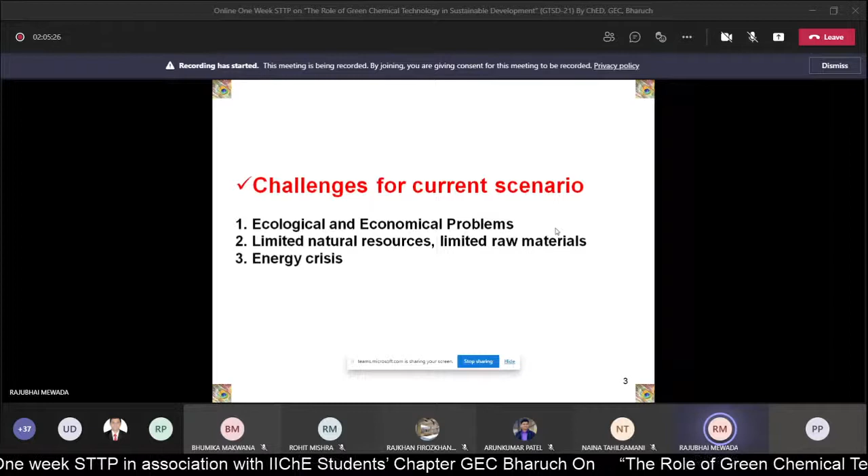So challenges - we all are facing ecological, economical and environmental problems. In a broader prospect, we are all aware that vehicular emissions, coming out from different vehicles like two-wheelers, four-wheelers, etc., whatever the fuel source - petrol, diesel, even CNG to some extent - it contributes probably the largest amount of pollution.

And the second issue is that it is mobile, moving, so it's very difficult to tap. Industrial gases are also another source of environmental pollution, but again this is with reference to air pollution we are talking about. All the major metro cities, including Ahmedabad, have severe air pollution levels. If you look at the air quality data published by the CPCB or GPCB, it's really very poor, and alarming at the same time.

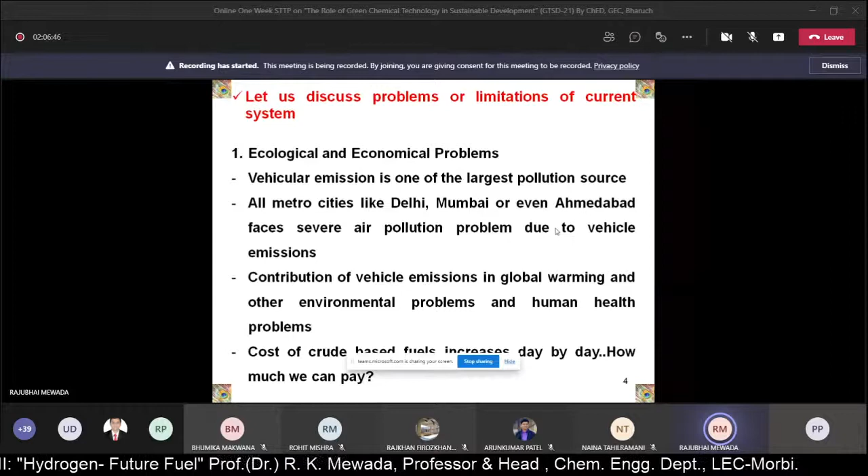Contribution of vehicle emissions to global warming is another big challenge, and all countries, including India, are trying to reduce carbon footprint. People are thinking to go for such fuel which can reduce not only emission issues but also be better for the environment.

And definitely cost-wise, prices of fuel are going up like rocket prices, extremely high. We don't know where this will stop, how much we will have to pay over time - we have seen drastic changes in the prices. Different scenarios are there, but we still have to accept that prices are going to continue to rise, and that's why different competitive technologies may come forward.

Limitations in terms of production and availability from the natural resource point of view. Crude oil as a natural resource is naturally available, we can't synthesize it in the laboratory, and it is available in a very limited geographical location.

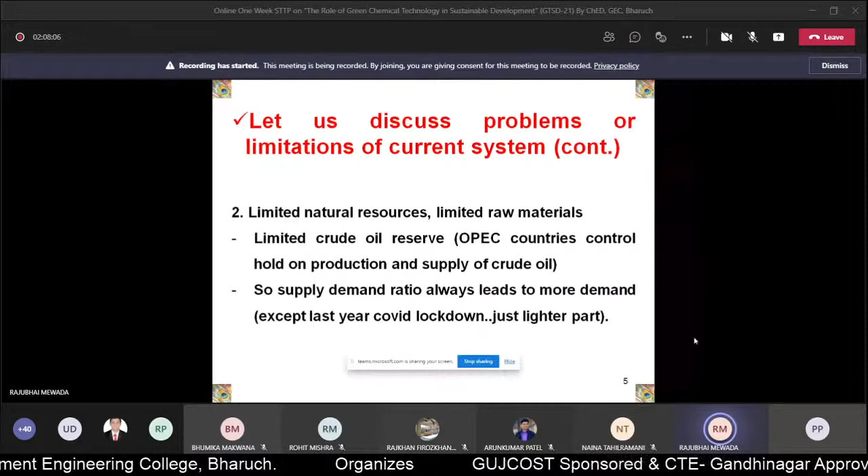OPEC are the countries who are producing and ultimately controlling oil prices. The supply demand ratio always leads to more demand, and that's the reason cost is going to increase, except last year where lockdown was there and crude oil prices suddenly came down.

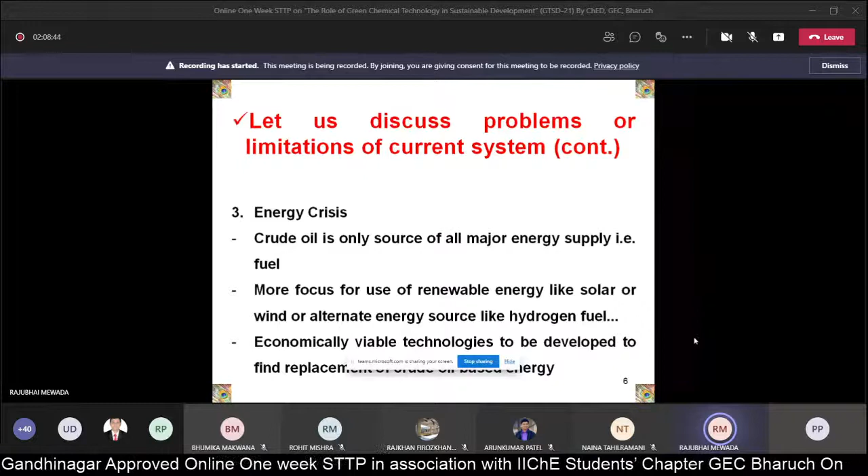Otherwise it's always going to be costlier. There's an energy crisis - demand for energy, and India being a developing country, unlike developed countries whose demands are stabilized, we are saying we are going to become a developed country. One of the GDP parameters is energy consumption pattern, so it is likely to increase tremendously. Whatever current energy consumption level we have, we expect much larger utilization in the coming future.

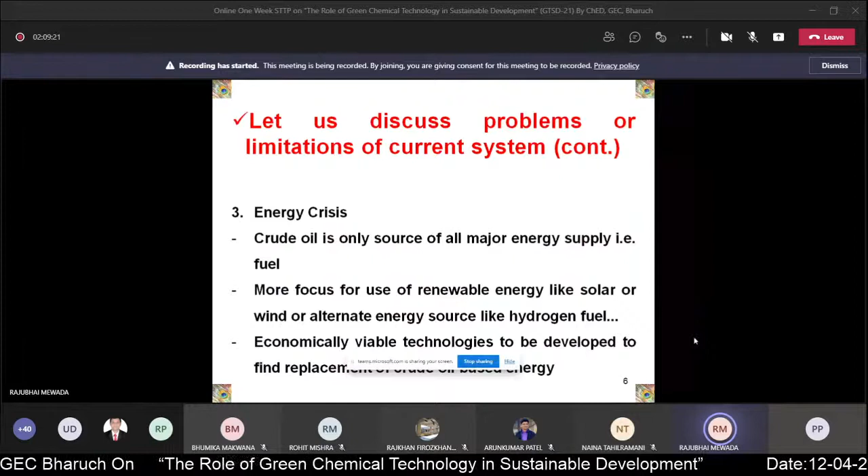Energy is required for industrial applications and also for transportation vehicles - that demand is going to be huge. So we expect an energy crisis, and we need to find a solution that can support environment, economics, and ecology. That's what we are looking for - what are the various possible solutions, and how best we can look forward.

People are talking about electric vehicles, which is definitely one of the best options available, and to some extent it has been applied and is being used nowadays. A few electric cars and electric vehicles are available on the road, and it's a successful technology.

But today I'm going to discuss hydrogen as a promising future fuel. We know that when hydrogen burns, it ultimately gives only water - H2 plus O2 gives water, and there are different technologies available.

We can produce energy from hydrogen through fuel cell or by combustion. Ultimately, when we combine H2 plus O2, it gives a tremendous amount of energy, and that energy we need to utilize.

But the thing is how we can produce it, because ultimately we are looking for hydrogen from water only. The method I'm going to propose should be sustainable - that's our objective. So whatever technology we propose should be sustainable, meaning it should be good for us as well as for our future generations.

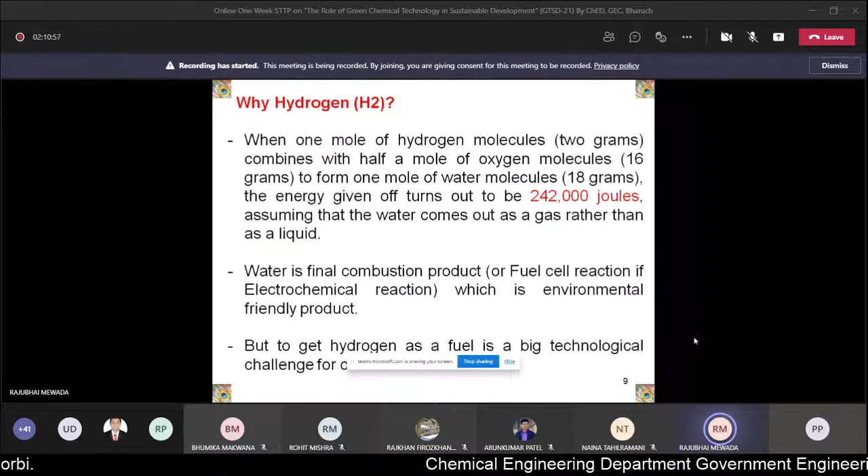So from that point of view, which fuel, how can we get the hydrogen? That is the biggest question - how can we get hydrogen? Hydrogen is good for utilization as a fuel for vehicular purposes, for energy purposes. But how can we get this hydrogen?

There's the amount of hydrogen we require, and different challenges - at the end of the PPT I've added a small portion, one slide regarding storage and transportation. That is another big difficulty. But right now our major focus is on the production aspects.

If we look at current technologies available right now, our common production technologies involve syngas production, either from naphtha or other crude-based raw materials - we can produce carbon monoxide plus hydrogen. Even coal gives us syngas, we can produce synthesis gas. But ultimately, hydrogen comes from either crude oil or coal-based raw material, which is going to be much costlier.

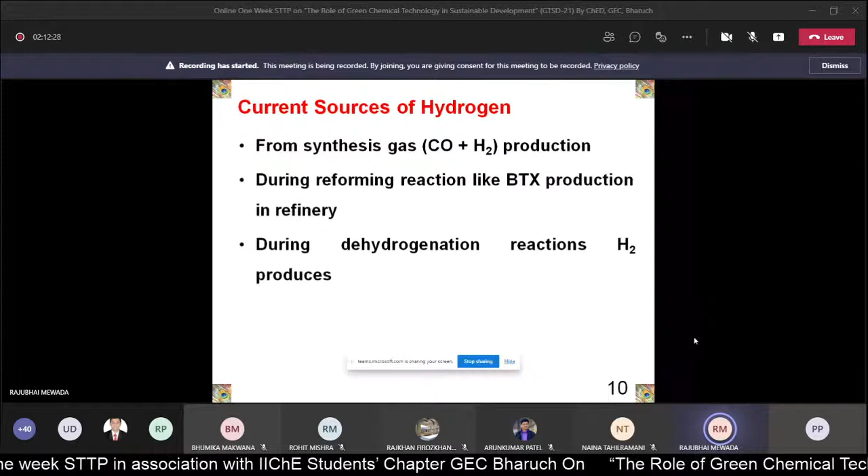The second option available is that hydrogen is produced currently in a refinery through reforming reactions - not steam reforming, but regular reforming reactions where we convert linear alkanes to aromatic chains in terms of benzene, toluene, and xylenes, which also produces a small amount of hydrogen. There are a few other sources of hydrogen production, such as dehydrogenation reactions.

But if you look at it right now, none of the refinery... I'm trying to compare with the sulfur case. In the previous days, we used to produce sulfur through the earth's crust.

We get sulfur from sulfur ores, which we process to get pure sulfur, a required raw material for sulfuric acid production. But nowadays, practically all the sulfur is coming from the refinery, whatever sulfur is required for different applications, not only for sulfuric acid production but for vulcanization, etc.

So where does it come from? Ultimately, all refineries need to reduce the sulfur content of various products, maybe petrol, diesel, kerosene, or other products, because sulfur content needs to be reduced substantially. That's why refineries convert sulfur molecules into H2S, and through the Claus process reduce it to elemental sulfur, which becomes a major raw material source for different applications.

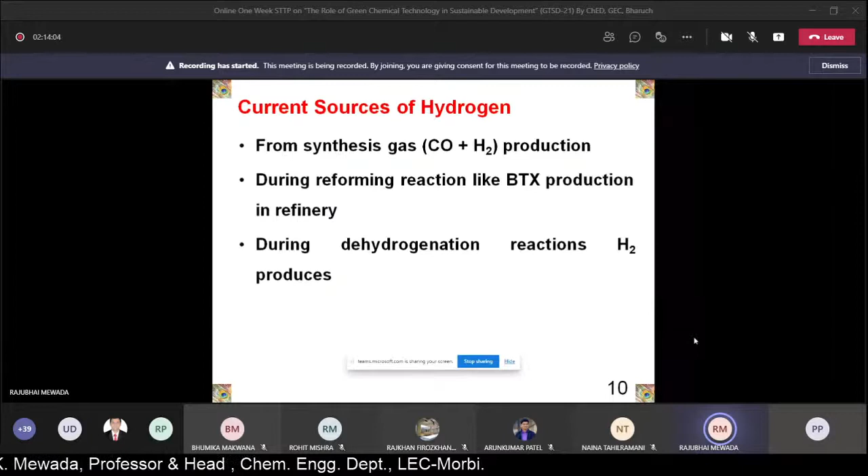So can we expect the same scenario for hydrogen? Can refineries produce hydrogen in excess that can be used as a fuel for different applications? Probably not. Why is it not possible?

If you look at it, all refineries have to treat sulfur nowadays because as per new government laws, we now have BS standard 6. Similarly, European standards are continuously reducing sulfur content requirements in fuel composition. If you look at the 1990s, we had almost 5% sulfur, then we moved to 50 ppm, then 10 ppm, and we're trying to reduce further.

It's expected that, for example in diesel fuel, it should ideally be sulfur free. So if we want to make it sulfur free, we need technologies that can remove sulfur completely. From a technological point of view, it's a big challenge.

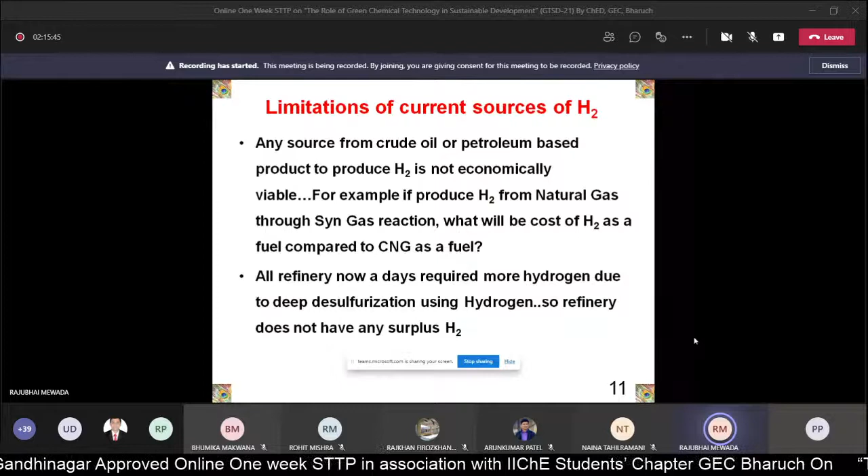So refineries need hydrogen again, because all desulfurization technologies ultimately involve hydrogenation. Deep desulfurization technologies, whatever the product, ultimately involve hydrogen. That's why refinery demand for hydrogen is also increasing for these applications, specifically desulfurization technologies. So hydrogen availability within the refinery is not in excess.

Refineries don't have any excess hydrogen; rather, they need to specifically produce hydrogen for that application. Whatever hydrogen is produced, either through reforming operations or dehydrogenation operations, is routed or utilized within the refinery for desulfurization technologies. That's why we can't expect hydrogen to be excess available with the refinery for us to use.

Second aspect: can we produce hydrogen from syngas, either from coal or CNG or any other raw material source? Probably not. Simple logic: if I try to produce hydrogen by reforming naphtha or natural gas, compare the price of hydrogen produced from CNG or natural gas versus the cost of CNG available and the cost of producing hydrogen.

Ultimately my purpose is the same either way - I need to compress it and put it in a cylinder to utilize it. So from an economical point of view, probably none of the technologies may give us economically favorable hydrogen production that we can use for the specific purpose of fuel.

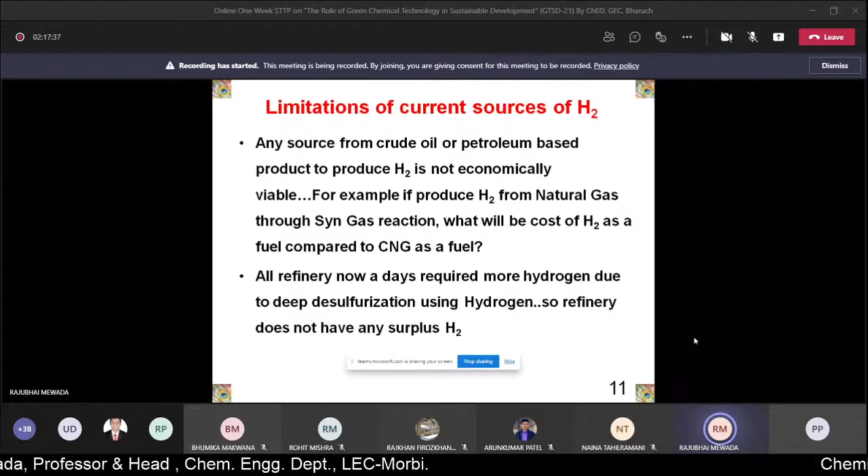So from this aspect, we're not expecting right now that any raw material coming from crude oil or coal base or other sources can be utilized to produce hydrogen, because whatever energy is required is again coming from coal or other sources ultimately related to crude oil. So both these aspects are tricky, and we need to think how we can produce it.

So ultimately the answer comes: how are we going to produce hydrogen? What are the sources of hydrogen that can make our future really green? We need to look forward. Again, we're saying that hydrogen and oxygen produce water, so the same water can be utilized as a source of raw material to produce hydrogen.

Definitely, it is a big challenge. So hydrogen from water using a renewable or alternate energy. Definitely, I have mentioned that when we combine hydrogen and oxygen, it produces a large amount of energy. When you make it reverse way, when you try to break water molecule, it requires a large amount of energy. So when we break that water molecule, it needs a large amount of energy. That's why this reaction is not new, there is nothing new in it, it is a very old known reaction. But still, because economically it is not favorable, we are not able to use it. Even nowadays, not a single technology is available where we can produce hydrogen from water under economically favorable conditions, and it is still not available.

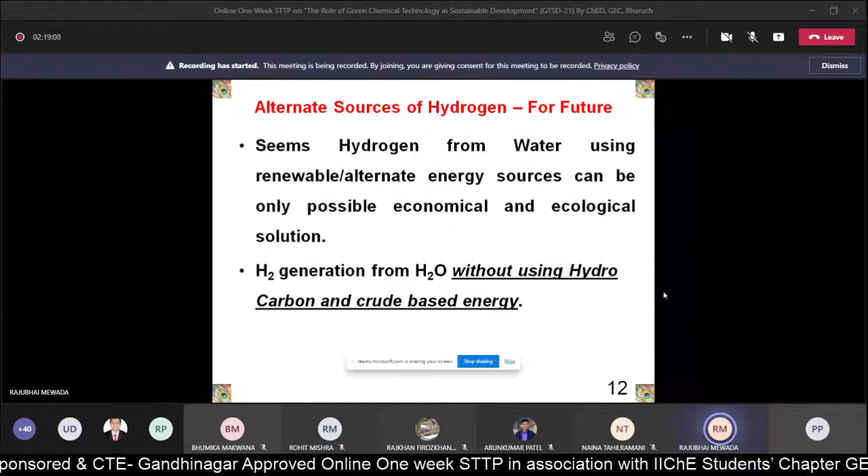Yes, we are talking about how as the prices of crude oil, petrol, diesel or any other fuel is increasing, we are expecting new technologies may help us. At the same time, incentives of reducing carbon footprints and other environmental advantages may give more concern to hydrogen production. So with this, we are going to start for that thing. Hydrogen generation from H2O without using hydrocarbon or crude oil based energy. We are expecting that we need to produce hydrogen ultimately from water, and that too not using a conventional energy source. We must use an energy source which is either renewable or cheaply available.

So various major technologies, point of view, if you look at it, electrolysis is a very well-known process. From years together, we know that we can produce hydrogen by electrochemical reaction, splitting the water through the electrochemical route. Second is the redox reaction, that's what I'm going to discuss. And again, thermochemical cycles are a part of redox reactions, and that's how this whole project has started.

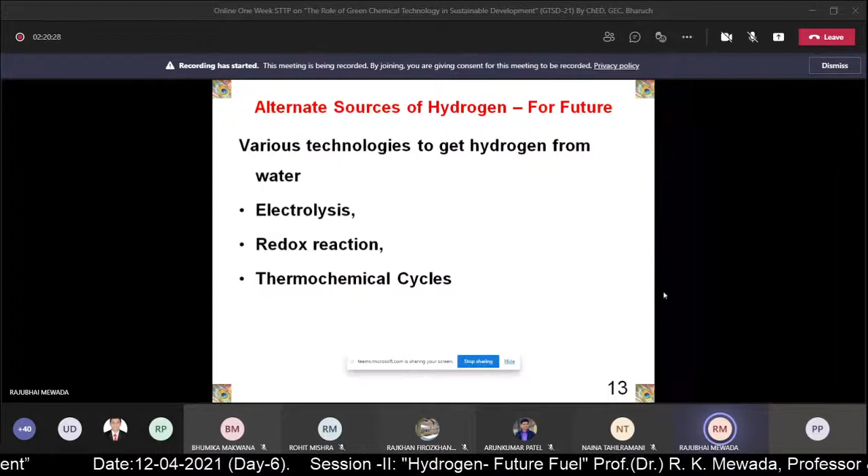So briefly, none of the technology still. Definitely, electrical vehicles are a fact, they are being available and used on the road nowadays, electric vehicles are available today. Definitely there are challenges, but similarly, there is no hydrogen car still. For few experimental purposes only it is being used, otherwise commercially it is not available. So this is a case where we are expecting that maybe down the line, after 10 or 15 years, we may have hydrogen as a fuel. That's why I've used this word. None of the technology yet proved to be economically fine, and at different stages of research, different institutes and researchers are involved in this very high profile research, very interesting to the industry as well as from the social point of view. We are expecting that we may come up with better technology which can economically as well as environmentally produce hydrogen which can be used for fuel purpose.

So just a common slide, hydrogen can be produced through the electrochemical route, electrolysis, where we use energy to split water into hydrogen and oxygen, using solar energy, or it can definitely be nuclear energy, wherever it is possible.

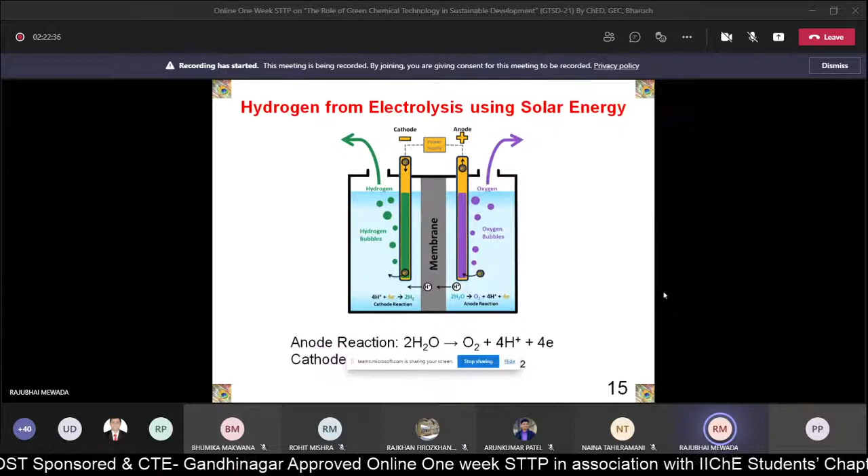But after the incident in Japan, after the tsunami, whatever leakages occurred in nuclear reactors, Japan, which was one of the major users of nuclear energy, and Germany too, decided to shut down all their nuclear reactors after that incident, and they looked forward to some alternate energy sources.

Just yesterday I was going through news that because Japan is geographically located such that their area availability is very small, they cannot use solar energy or something similar. So they are expecting that if they want to reduce their carbon footprint, because they are a developed country with very high energy utilization, they need a large amount of energy, so they are expecting hydrogen as an energy source, as a fuel, that they are ready to import. They are changing their national policy accordingly, and down the line by 2030-40 they want to substantially reduce their conventional energy source and replace it with a better or green methodology like hydrogen.

One source of hydrogen production is water electrolysis, water splitting through electrolysis. But the energy used for this is important, because otherwise this is a highly energy intensive process. It consumes a large amount of energy.

We expect this can only become viable if we have a substantially lesser cost of solar energy. In the last 5 years there has been a substantial reduction in solar energy costs, and the government is also promoting rooftop schemes. Many houses and farmers are installing solar PV cells. Similarly, we expect that if PV cell technology cost is reduced further, it can be successfully utilized for the electrolysis process.

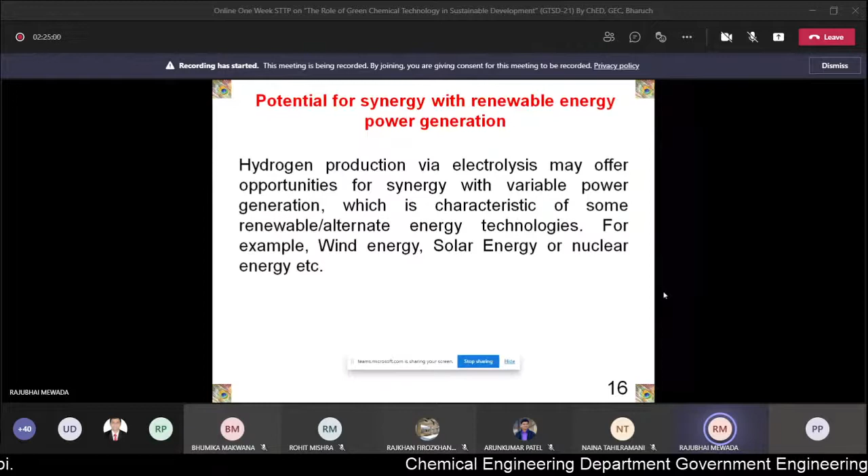Energy integration with solar, wind, or nuclear can be considered. Research focuses on overcoming challenges, reducing the capital cost of electrolyzers, which is one of the major costs, along with the balance of system, improving energy efficiency for converting electricity to hydrogen, and integrating compression into the electrolyzer to avoid the cost of a separate hydrogen compressor. This is just a research aspect.

What I am interested in, and where I started this thought, was almost in 2009, after completion of my PhD. At that time, one project on the copper chlorine cycle was started, sponsored by ONGC, under my guide's research group.

So I was thinking, can we have something like a battery? When we use a mobile phone, we have a battery which we charge and discharge. After charging, we use it throughout the day, it gets discharged, and we recharge again. Can we do the same with energy? Because ultimately I want to utilize chemical energy. Petrol and diesel are better as fuels because their energy density is very high, we can have a large amount of energy in a small volume. So can I have such a chemical battery, and can I utilize energy through natural resources?

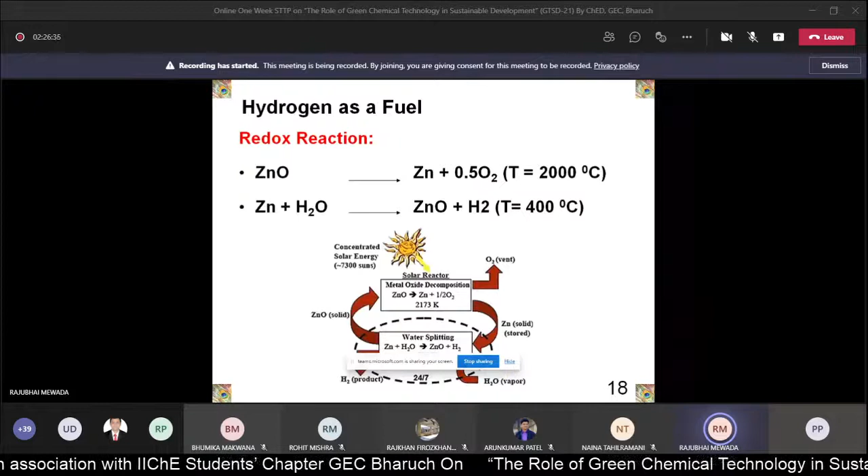Through literature, I came to know about redox reactions. It's a very simple concept: we can have reduction of any metal oxide. Here's an example: zinc oxide. If I carry out its reduction, removing the oxygen from zinc, it produces pure zinc and oxygen. And this zinc, if we add water and carry out hydrolysis, zinc oxidation is carried out in presence of moisture or steam, then it produces zinc oxide again and produces H2 as one molecule.

So now if you look at it, this zinc oxide, I have regained it again. After oxidation of zinc, I'm getting zinc oxide. If that zinc oxide is reduced at high temperature, it is converted to zinc and produces oxygen.

But the thing is, zinc oxidation is very easy at almost 400 degrees centigrade. I can carry out a zinc to zinc oxide reaction at 400 degrees centigrade, which is reasonably achievable, though high temperature. But reduction of zinc oxide takes place at almost 2000 degrees centigrade, which is extremely high.

From a concept and theoretical understanding point of view, this looks very nice, a very fantastic reaction. I can carry out reduction of zinc oxide and remove the oxygen very easily, provided at 2000 degrees centigrade. And the same zinc I can reoxidize again at 400 degrees centigrade, producing hydrogen. This hydrogen is the chemical energy, considering whatever temperature and energy is required.

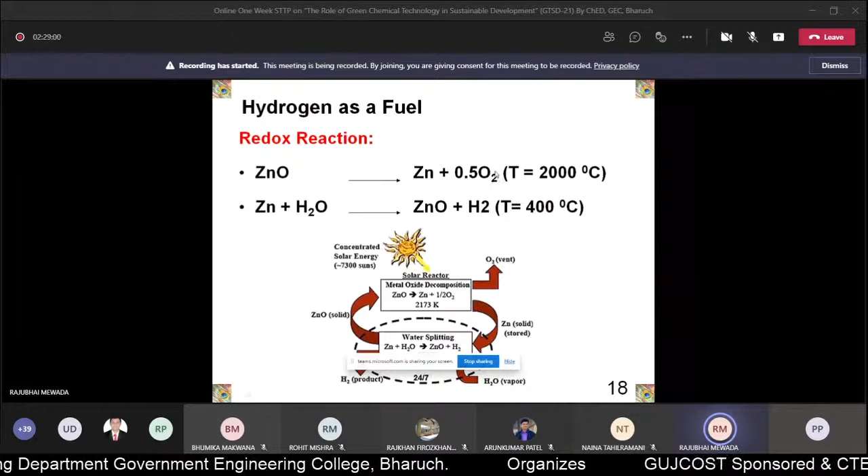So definitely I liked it very much, and I worked in a different way. I carried out a different literature survey, then I came to know what are the problems and how. So one of the solutions we can think of is how we can achieve this high temperature.

Our condition is that we are not supposed to use any conventional energy source or conventional power, electricity available. If I have to use anything, I have to use either solar energy or wind energy. We are not opting for nuclear energy either, as it is not possible. So the only option we have available is solar energy. Can we go for it? Yes, theoretically, let us see how we can do that.

Success of redox reactions depends on how efficiently we can achieve the required high temperature, around 2000 degrees centigrade. There are different metal oxides which can be reduced at different temperatures, but most of the metal oxides which can be utilized require even much higher temperature than 2000 degrees centigrade. So that's why I will put an example over here.

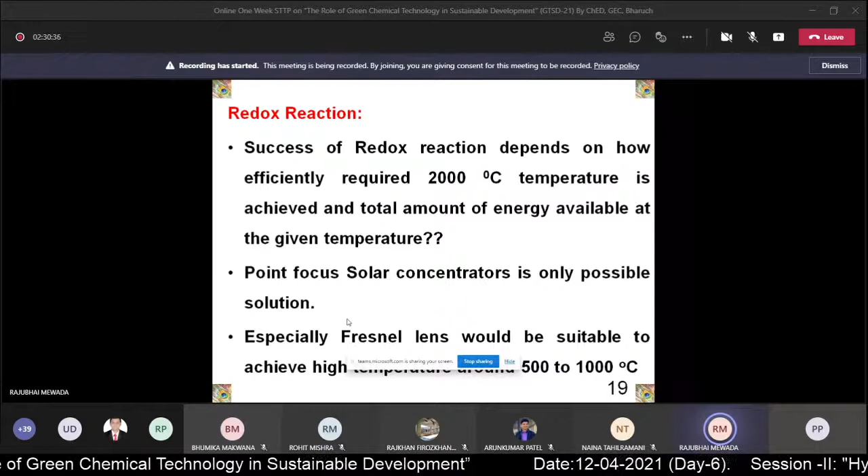I have tried with different point focus solar collectors. There are different types of solar collectors available, starting from flat surface, which conventionally we use as a solar cooker or solar heater to increase the temperature of water. But temperature rise in a flat type is hardly around 80-90 degrees centigrade, or if it is an evacuated tube, it may be around 200 degrees centigrade max. If we go for point focus solar collectors, we can have a high temperature almost in the range of 400 degrees centigrade.

And it depends on the different scenario. A point focus solar collector is like a magnifying glass. We used to have that magnifying glass during our school days, and we used to light up, burn paper or wood using a magnifying glass. So it's the same application, but we can have it at a much larger scale.

And the second option is the use of a Fresnel lens, which is also like a magnifying glass, but has a much better design. So I tried to use that, and could achieve almost 500 to 1000 degrees centigrade. But still, the challenge of attaining 2000 degrees centigrade is not an easy task.

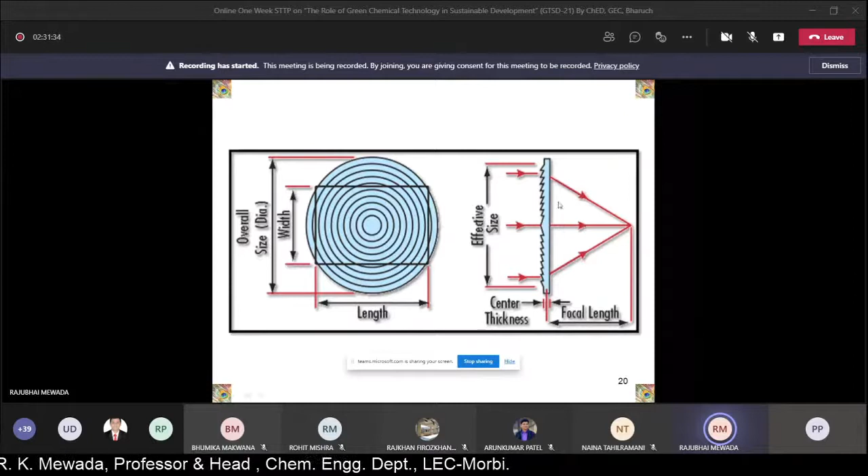So just for understanding, you might have come across this design of a Fresnel lens. It looks like something like this, where concentric lines are there, and again it works like a point focus. We are going to get a point focus or very high temperature at the focal point.

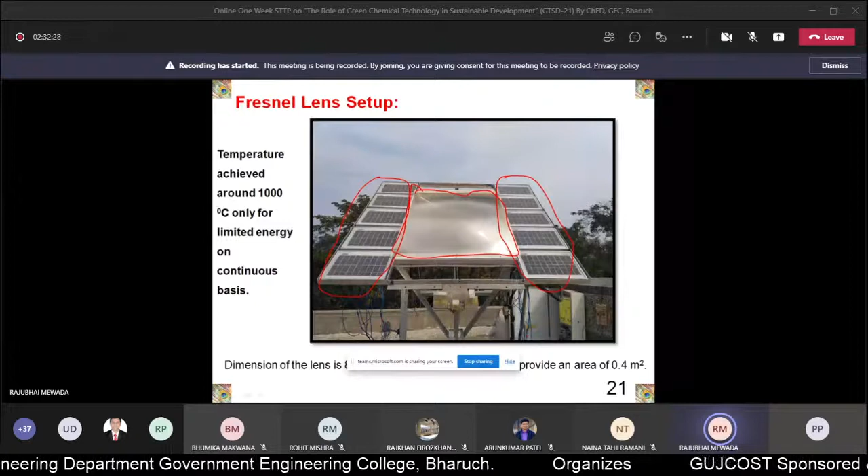I made it in such a way that it depends only on solar energy to move this and to collect solar energy at the focal point. With this I could achieve, devising is another matter, but almost around 500 to 1000 degrees centigrade. I have carried out certain reactions taking place almost at 1000 degrees centigrade, that's why I'm putting it here as achieving around 1000 degrees centigrade.

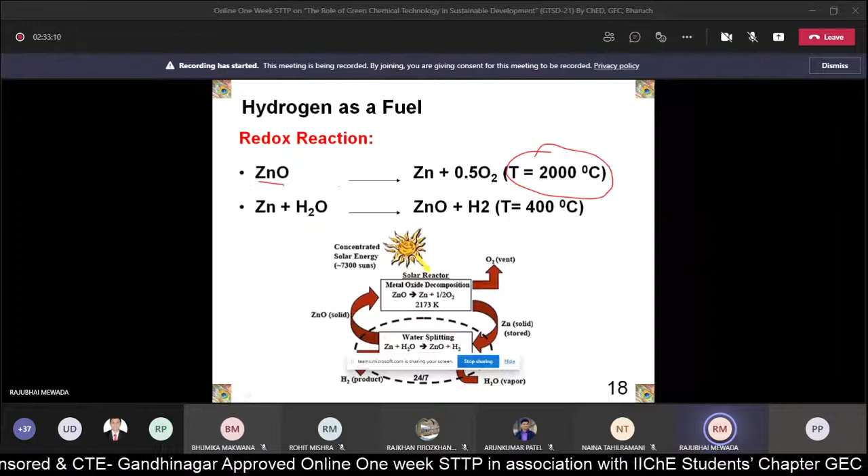But this is for instantaneous or momentary purpose. When we use it on a continuous basis, it was not able to reach it. So in this redox reaction, one of the major limitations is we cannot achieve 2000 degrees centigrade. Any other reactions with any other metal oxides - this is the lowest temperature which we found in the literature survey.

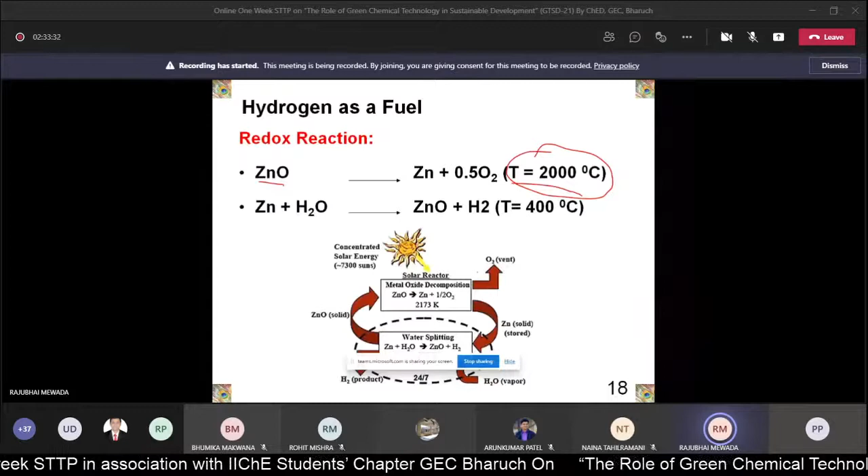So it is impossible. If I could not find any other way, definitely we can further focus on other things, but achieving 2000 degrees centigrade is a big challenge. So even though it seems very interesting and theoretically looks possible, practically it is not possible to achieve it.

So that's why research is going on, and now I'm coming to the main point where the thermochemical cycle comes into the picture. Thermochemical cycle works on the same concept that we are going to utilize, but there are different chemicals involved in the whole cycle, and ultimately only consumption of water is taking place, which produces hydrogen and oxygen, and the rest of the chemicals are being recycled on a continuous basis. This is the whole concept of the thermochemical cycle.

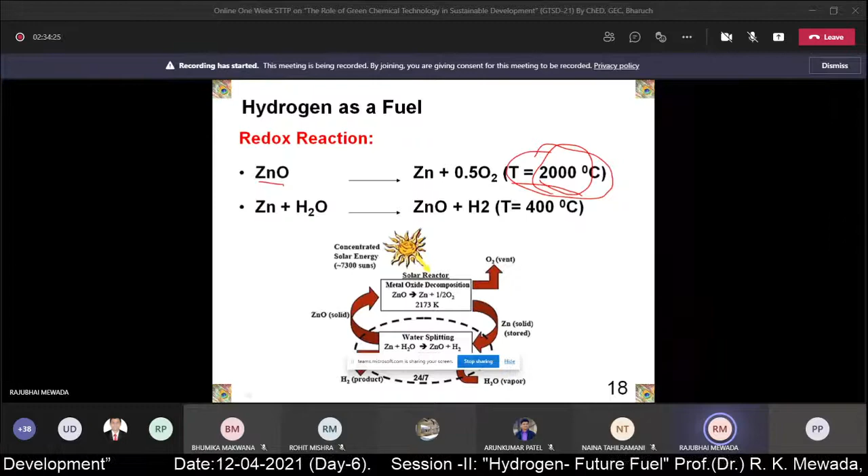What is the reason that I mentioned the zinc oxide redox reaction? Reduction of zinc and again oxidation of zinc. It's a wonderful cycle, only a two-step cycle, but it requires very high temperature. And that's why, if I want to ultimately make it a success, I need to reduce this temperature. So we must be able to think of something else in such a way that we can reduce this temperature to make it practical or achievable. That's why there are almost more than 350 different cycles proposed.

350 different cycles are theoretically available in the literature survey, but most promisingly, different researchers throughout the world are working on a few major cycles: the sulfur based cycles, like the sulfur iodine cycle, the copper chlorine cycle, iron chlorine cycles, cerium chlorine cycles, and vanadium chlorine cycles.

So ultimately, why are we going for this? These are all multi-stage processes, where it involves using hazardous chemicals and handling hazardous situations. But the thing is that theoretically we expect that all the chemicals, even hazardous ones, need to be recycled. They are completely recovered within the process and recycled, and the only consuming element or molecule is water.

So with this concept, these are the various cycles being researched at different institutes by different researchers. And ultimately, why are we going for this? Because I need to reduce the temperature, to much below maybe 1000 degrees centigrade. Most of these cycles have a highest temperature around 850 degrees centigrade. All have a different maximum temperature.

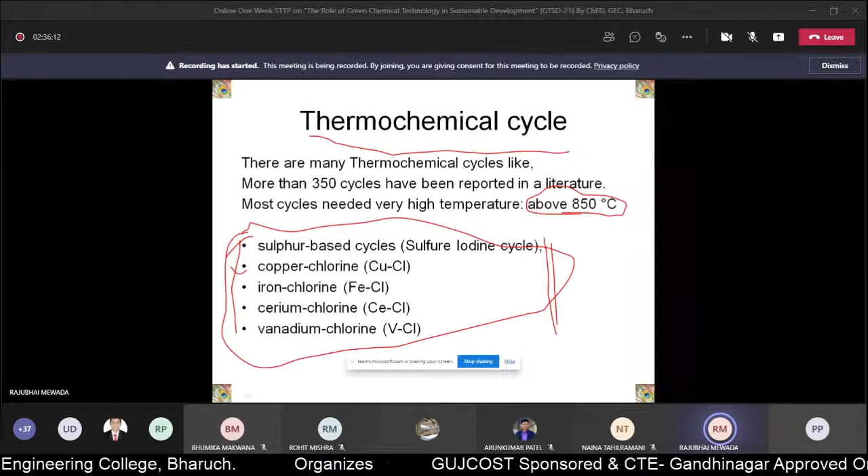Out of these, I've decided to work on the copper chlorine cycle, which I'm going to discuss now. This whole project I have carried out since somewhere around 2012, and I got financial support from Gujcost from 2014 to 16, and one more minor project I did for the same purpose from my university itself. This is a piece of work which my students have worked on - masters students as well as undergraduate students have supported and helped me in this project.

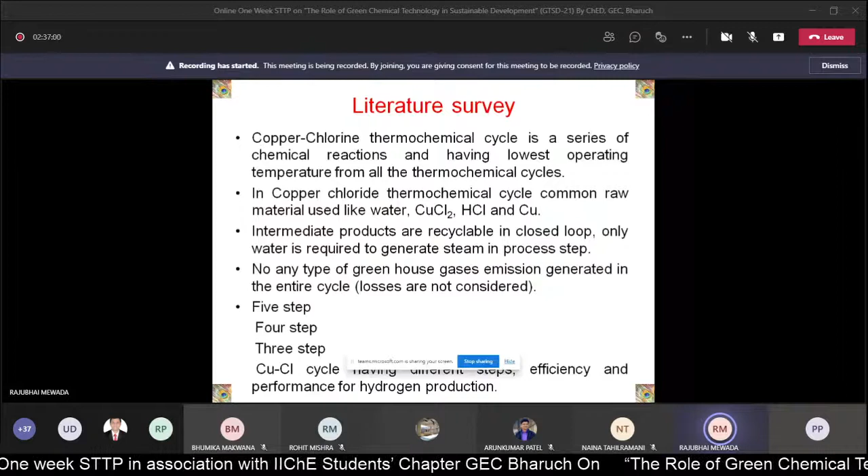As per the literature survey, the copper chlorine thermochemical cycle is a series of chemical reactions having the lowest operating temperature. How lowest? That will come to know, I will discuss that. Out of all the cycles, copper chlorine was found to have the lowest highest-temperature requirement, around 540 or 550 degrees centigrade. That is the highest temperature in the whole cycle, which is practically achievable. That's why it is the most important thing among all thermochemical cycles.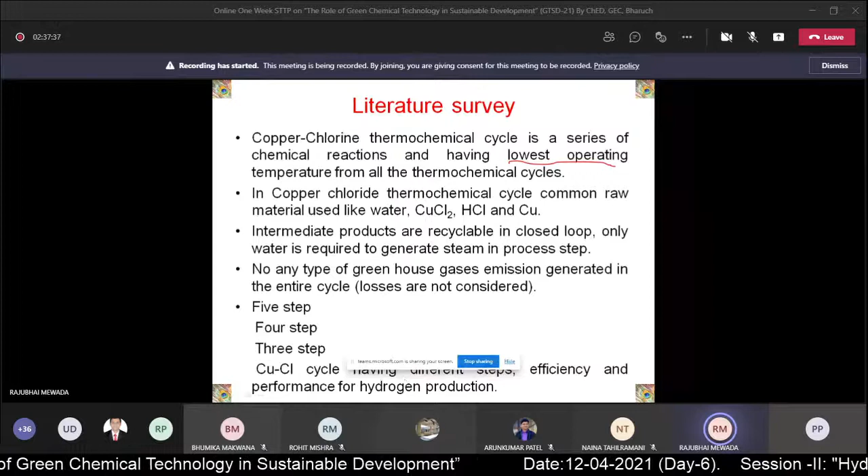The copper chlorine thermochemical cycle commonly uses water, copper chloride, CuCl2, HCl, and copper. This HCl is going to be hazardous. Intermediate products are recyclable, and in a closed loop, only water is required to generate steam in a process step. So ultimately, only water is being consumed. The rest of the chemicals are recycled and recovered completely - that is what we are assuming. Definitely, when we go for practical applications, some losses have to be expected. Theoretically, there are no greenhouse gas emissions, because we are consuming only water - no other gases are eliminated or removed from the process.

There are different steps: a 5-step process, 4-step process, or 3-step process. As we reduce the number of steps, the highest temperature required increases. So in my case, I've chosen the 5-step process.

Definitely some challenges. Reactor design and fabrication was a very crucial aspect. Material of construction is another challenge. And solar energy as a heat source, how we can achieve it.

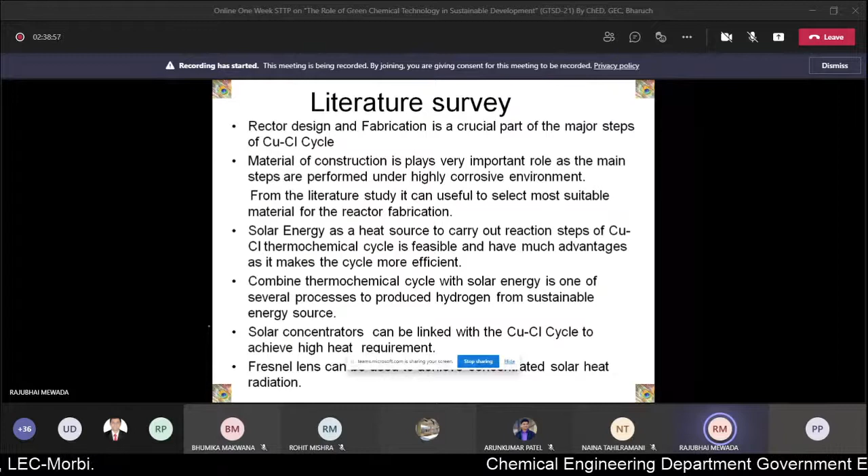Right now, I'm not going to discuss much about the results, but just an overview. So material of construction is another challenge, and solar energy, how we can utilize it, I'm going to discuss that. How the setup which I've shown about Fresnel, that was when I almost ended the project. At that time, I could achieve it, but before that, I faced lots of other problems, which I'm going to discuss briefly.

Combining the thermochemical cycle with solar energy is one of several processes to produce hydrogen. Solar concentrators can be linked with the copper chlorine cycle, and the Fresnel lens is one of the options available. Why did I choose the copper chlorine cycle? Because it involves a maximum of 530 degrees centigrade. My highest temperature in the whole cycle is maximum 530 degrees centigrade.

The intermediate chemicals are relatively safer and inexpensive, compared to, say, the sulfur iodine cycle, where handling sulfur and iodine is more corrosive and more difficult in that sense. Reactants and products are commonly and easily available; all the chemicals are available easily.

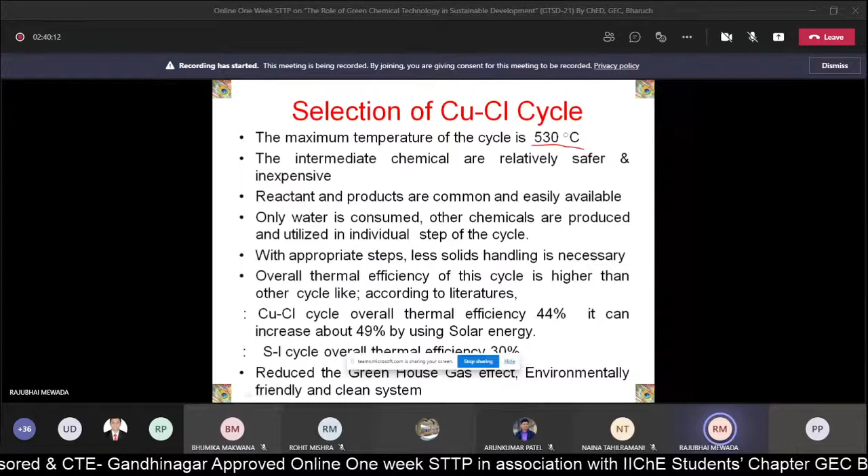Only water is being consumed, as I already mentioned. With appropriate steps, less solid handling is necessary. Throughout the process, copper comes into the picture, and solid handling, particularly for copper oxychloride which produces the intermediate product, comes as a solid. Handling a solid is the most crucial aspect.

From an energy efficiency point of view, the thermal efficiency of the cycle is around 44%, and it can increase up to 49% compared to other cycles. It reduces the greenhouse gas effect, is environmentally friendly, and a clean system, provided we can recycle all the chemicals and recover all the intermediate chemicals.

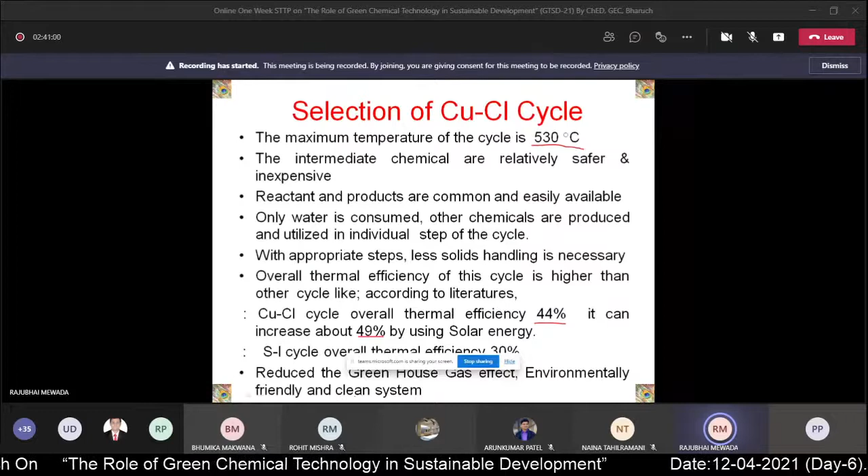With this expectation, I'm not saying this technology is a success story; definitely it is a failure story, because I have learned many things, but ultimately we could not produce the final product economically. Still, I'm sharing this because we have learned something from it.

So now let us look at the various steps involved in this copper chlorine thermochemical cycle. First step, let me put up the whole slide, then it is better.

This is how the whole picture looks. If you look at the whole process, ultimately everything is being recycled, except H2O. So in the whole process, the only consuming molecule is water, and ultimately we are producing hydrogen and oxygen as output. The rest of the chemicals are being recycled and reused throughout the whole cycle, and that is definitely the striking feature of the whole process.

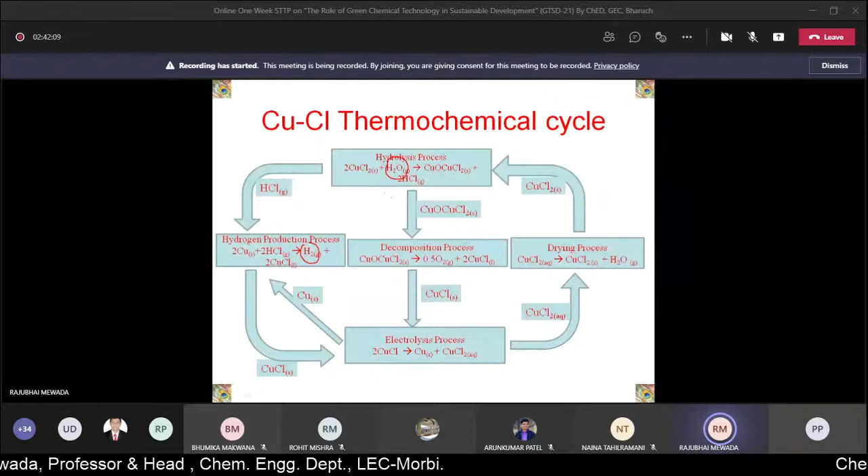For example, we have copper chloride, CuCl2, and if we carry out hydrolysis in the presence of steam, it produces copper oxychloride, an intermediate product that needs to be decomposed. This is a solid product, which needs to be decomposed again at high temperature, producing oxygen and copper chloride, which needs to be electrolyzed. The electrolysis process is needed to ultimately produce copper.

This copper is then utilized to produce hydrogen by carrying out a reaction with HCl. This copper is recycled to the process where it produces CuCl again, and this CuCl is sent to the electrolysis process where we produce CuCl2 again. Because it's an electrolysis process, water is present, so we remove the water content and it needs to be recycled again to the first process where we carry out hydrolysis of copper chloride.

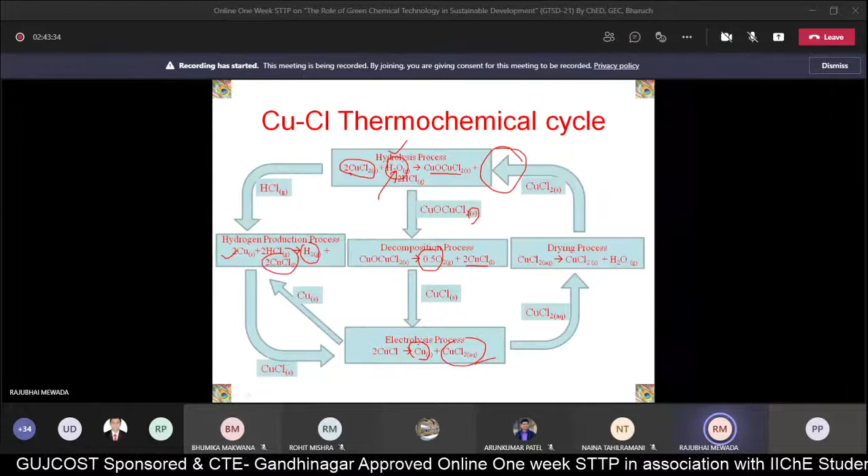So this is how all the compounds or molecules we use are recycled back and reutilized throughout the cycle, except one molecule, water. We can say that only one raw material enters the process externally, water, and we get hydrogen and oxygen as output, our desired product. This is a fantastic and very interesting reaction, but also very complicated in nature.

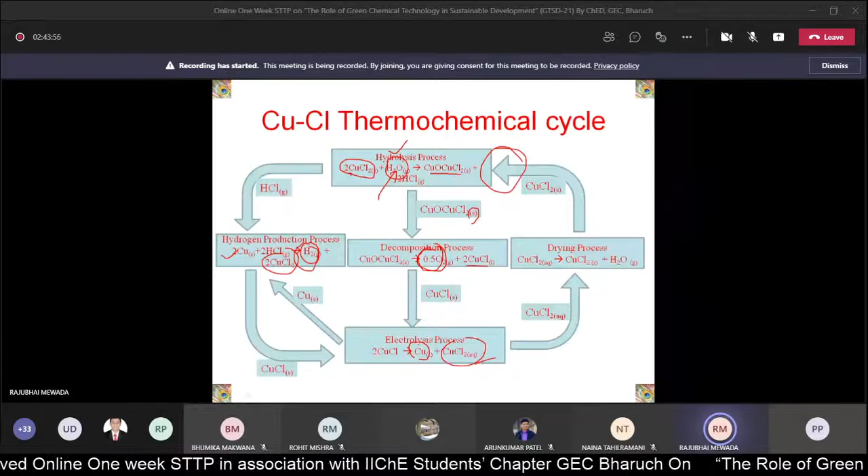It's a multi-stage process. The various temperatures required are mentioned here; the maximum temperature is around 530, 540 degrees centigrade. This is a 5-step process with different chemical reactions taking place at different stages. This is a solid product, and whenever solid comes into the picture, you need to think about how we can remove these products from the reaction mixture.

Electrolysis process, hydrogen production which is the main reaction, and drying processes. These are the different temperatures involved for each step.

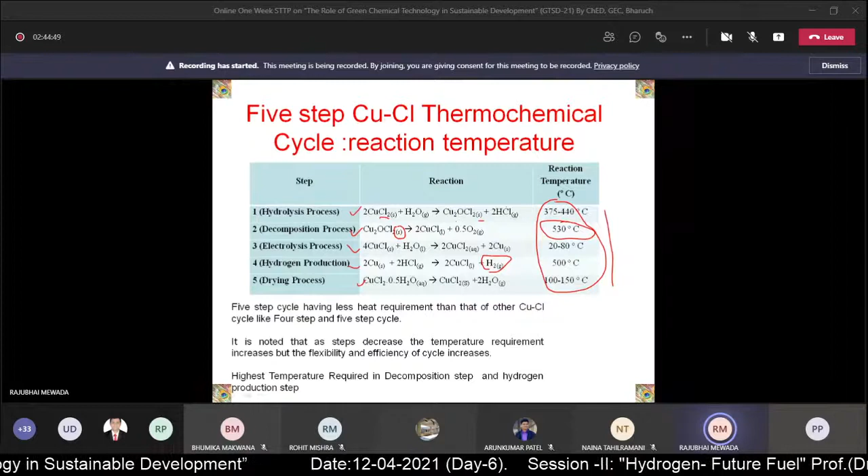This is definitely a big challenge. I mentioned that these experiments were carried out in my university laboratory, and we have done almost everything with scrap, designing whatever we required. I'm sharing this as a small story of how we handled these different difficulties and how we tried to solve them.

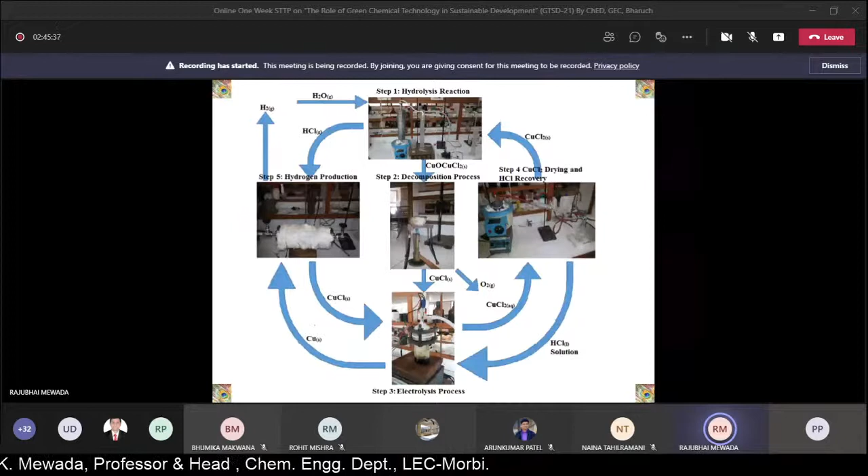Experimental setup: I mentioned that we need to ultimately produce all the compounds, and the final desired output is expected so that all the reactions are carried out using solar energy. But to build up confidence when we started this project, along with my undergraduate and postgraduate students, we first needed to think about what we were going to get.

So first of all, we carried out all the reactions using conventional energy. I repeat, we carried out all reactions using conventional energy like electricity, and these are the various steps involved. Whatever we required, we designed ourselves and fabricated it. It gets fabricated through an outside fabricator, but we designed it and carried out all the reactions in the laboratory, through all the different steps.

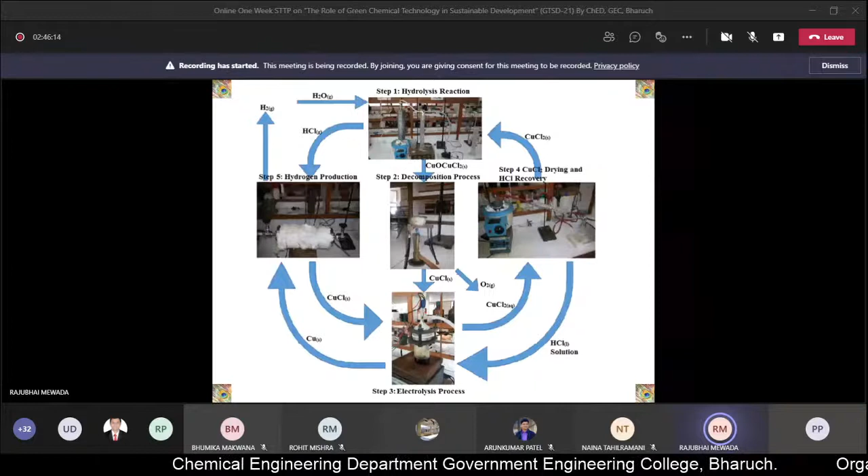I'm not going to discuss this in detail, but these are the various steps, and later on we link it to solar energy. This is for demonstration purposes, showing how these hydrolysis reactions were carried out.

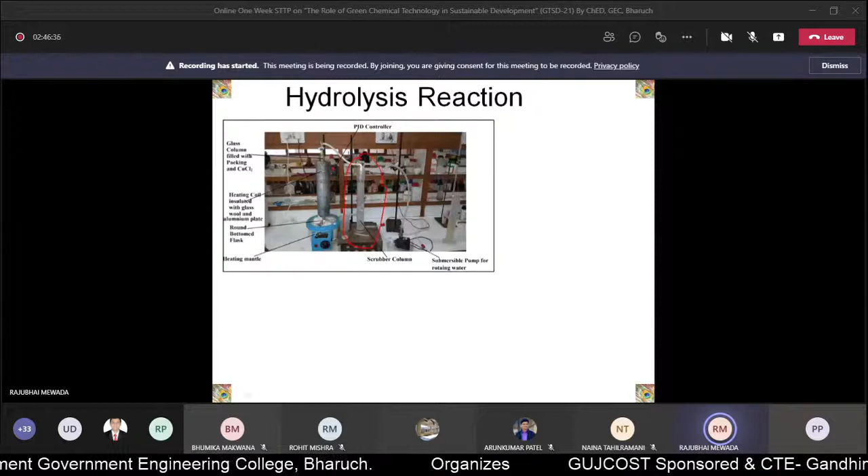What you can see here is a wonderful glass column which we fabricated, trying to remove whatever comes from the HCl reactions. We need to remove excess amounts of unreacted HCl, or sometimes other unreacted gases that come out, which we need to remove and absorb.

In special cases, we designed this ceramic-lined reactor, small volume, to check how the material of construction affects the process. One of the results I will show you.

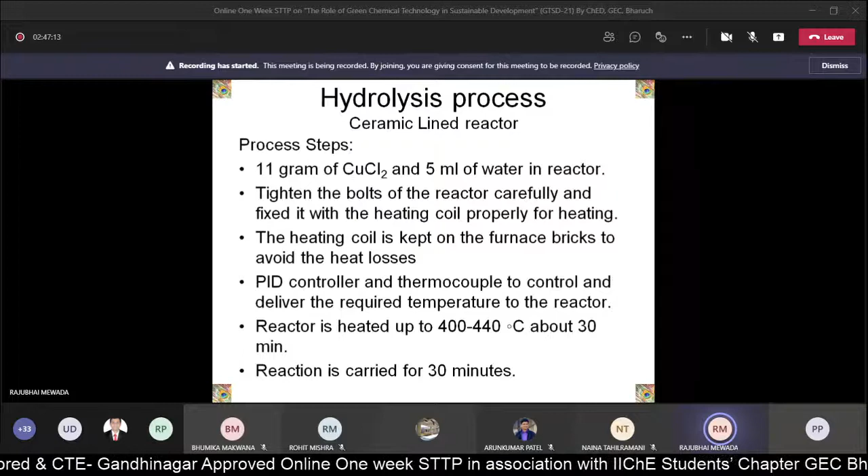I put these slides just to give a feel for how we worked with this. This is what happens in the final hydrolysis step, the final product is a solid, and it's corrosive in nature.

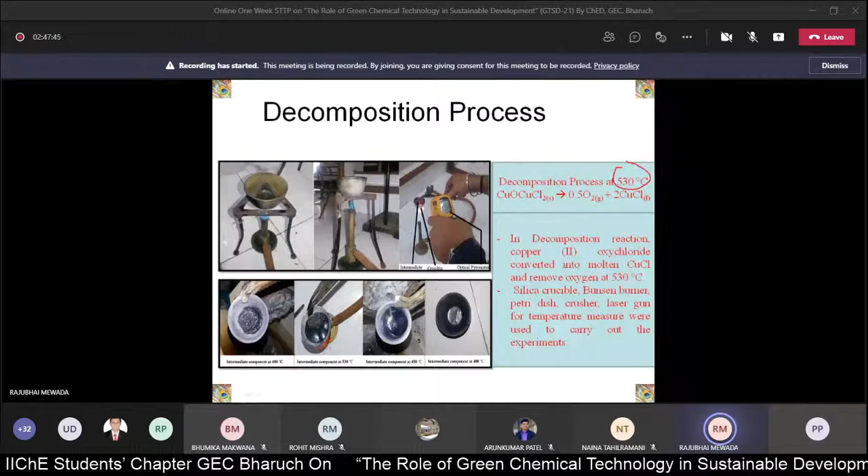Decomposition steps. This is the highest temperature required in the process, 530 degrees centigrade. This is with conventional energy, and then we replace it with solar energy.

Electrolysis process, where copper deposition takes place, because ultimately electrolysis is used here to get copper as one of the solid products.

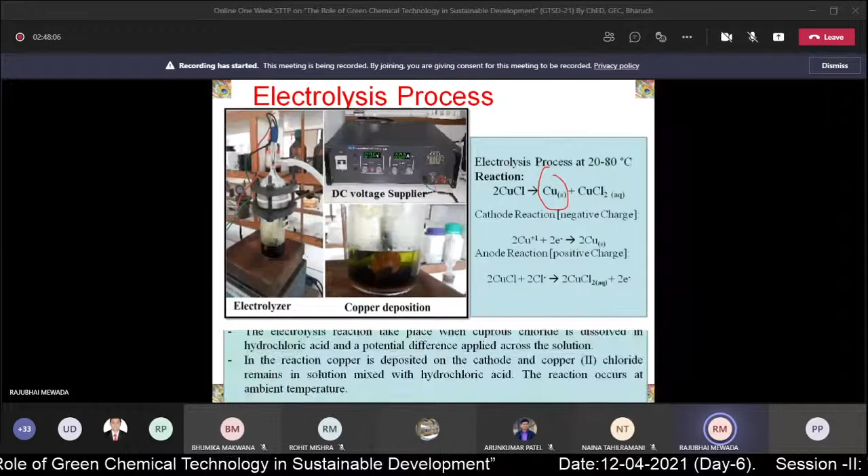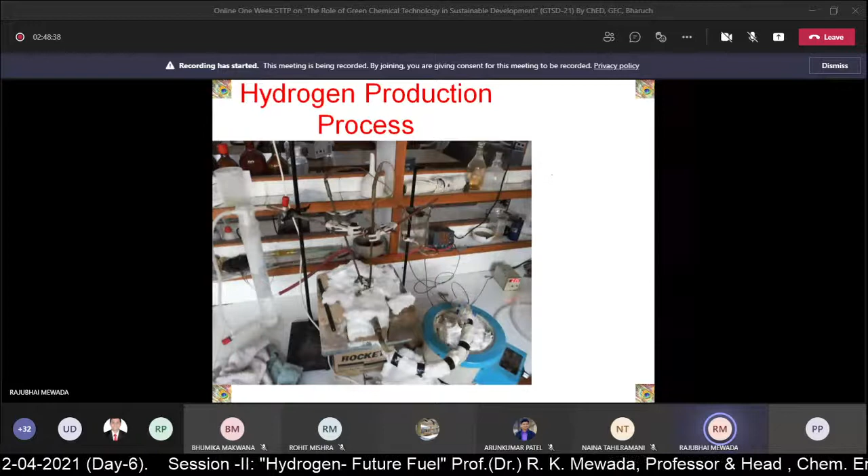I mentioned that we carried out all these steps using conventional energy, just to build confidence that whatever steps we follow, it at least produces the desired product. Now we need to integrate it with solar energy, and this is the final step of hydrogen production, where we carry out the reaction with copper: copper plus HCl gives H2 and CuCl. Collection was one of the major issues, but we could still manage some.

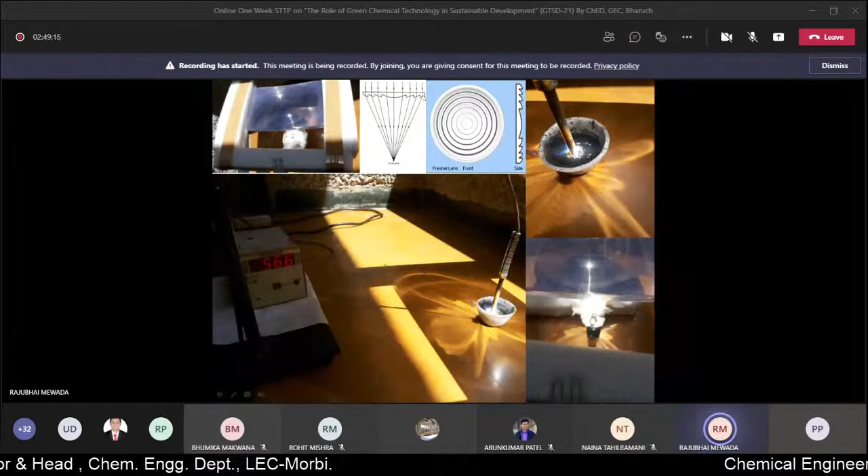So now we need to integrate this whole concept of producing hydrogen from water using a copper-chlorine cycle with a 5-step process, again using solar energy. For that, we looked at devices, and when I started, I was not sure how we could achieve the desired reaction. After literature review, we arrived at this approach.

Fresnel lens is one application, because the availability of magnifying glass is very limited, hardly a maximum of 10 centimeters, or maybe 15-20 centimeters at most available in the market. If we go for fabrication at a very large scale, maybe 1 foot or 2 feet, the cost becomes extremely high, or it's not even available.

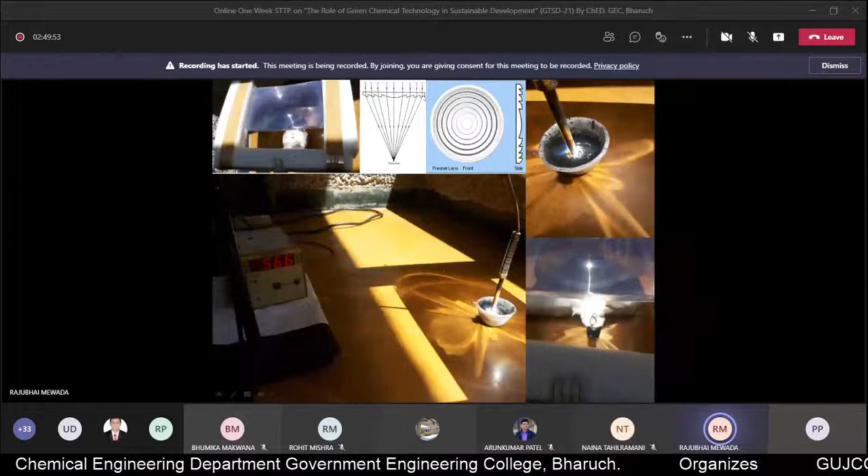So when I was searching for the Fresnel lens, I came to know that we used to have overhead projectors in olden days. Nowadays we definitely use LCD projectors, but in previous days we used to have slides that we needed to project on the whiteboard.

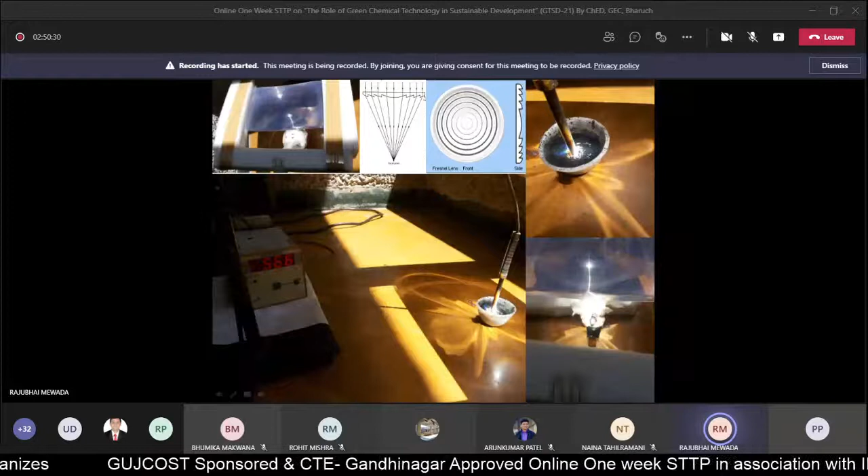So that OHP has this Fresnel lens, right? One such OHP was available in Nirma, and I utilized it with the permission of the department. It contains two Fresnel lenses, because its purpose is to magnify. If you put an A4 size slide, it projects much larger, almost 3 feet by 3 feet, or 4 feet by 4 feet on the whiteboard. So that's what its purpose was, magnification.

But here now I was doing it in a reverse way. When I want to focus it, I want to achieve the focus on the center line, so I remove that magnifying glass. I utilize it for this chemical reaction purpose.

And you can see here, just for demonstration purpose, this is the thermocouple which I've attached, and this shows me almost 566 degrees centigrade, which I could achieve at the focal point with this magnification, with this particular Fresnel lens.

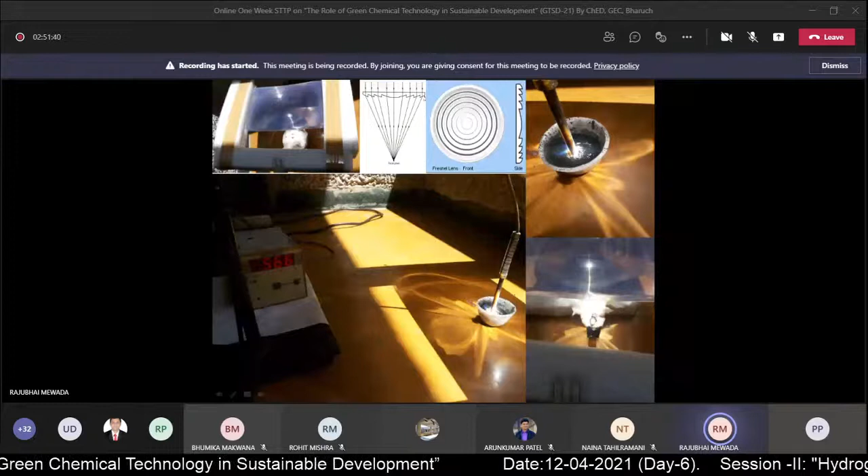So definitely the required temperature we can achieve, but the thing is the integration, how we can integrate it with the required setup. So again, I am saying this is not a success story. This is where we got failure in terms of not being able to produce the final desired product in an economical way. But still, this is just to demonstrate that yes, we can do what we want. If we go further, probably we may get success. Definitely we need to put in a few more efforts, but that's just what I'm sharing, this small part.

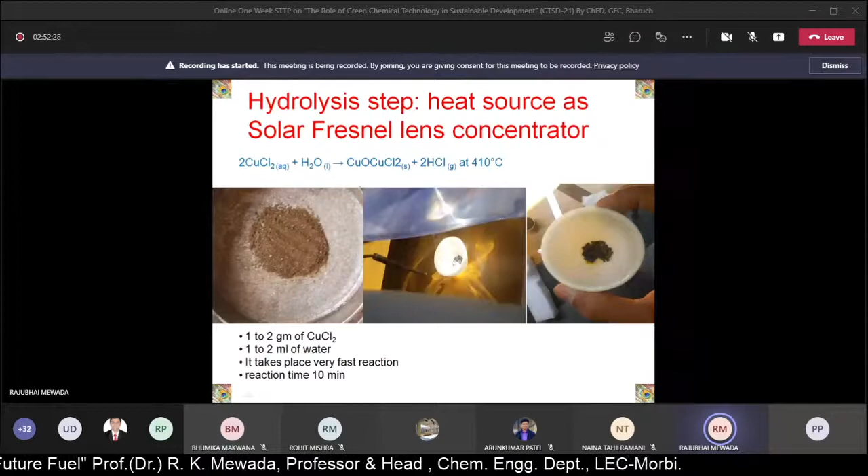So this is how we devised a Fresnel lens, which was available from the overhead projector OHP, and we have utilized it for different applications. So almost practically, we can say wherever possible, all the reactions we try to carry out using this solar energy. We already carried out all these reactions, we know the steps, we know the mechanisms, how to proceed. Only thing is that now we need to utilize solar energy, and that's why we have to repeat all the steps, all the reactions, using this Fresnel lens.

And I can say that definitely we have produced all the products which we produced using electrical energy or conventional energy. The same products we could achieve when we got it using this Fresnel lens. And definitely for electrolysis, it's easy that we can use a PV cell and convert it to electricity, and we can carry out electrolysis steps also.

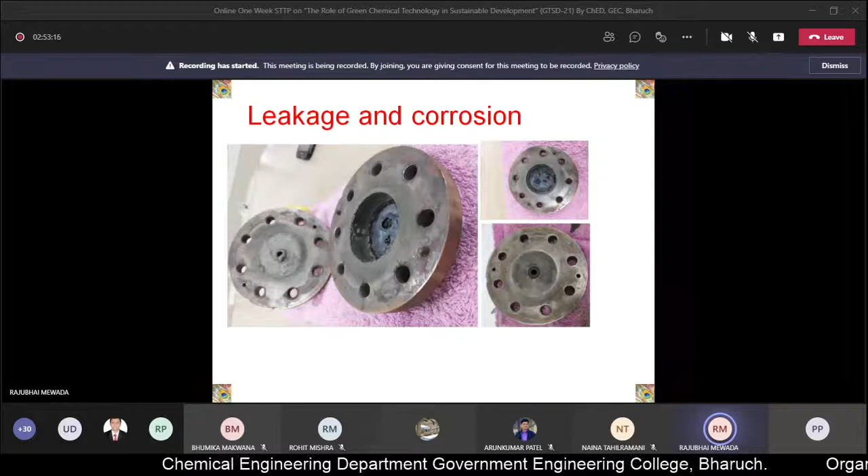So some of the problems which I mentioned, just the problems in the experimentation part, what we have found. One of the major issues, I mentioned relatively less hazardous chemicals, but still HCl handling by itself is highly corrosive. Intermediate products, copper chloride at high temperature, become corrosive in nature. So leakage and material of construction is one of the major problems we face when we go for large scale production.

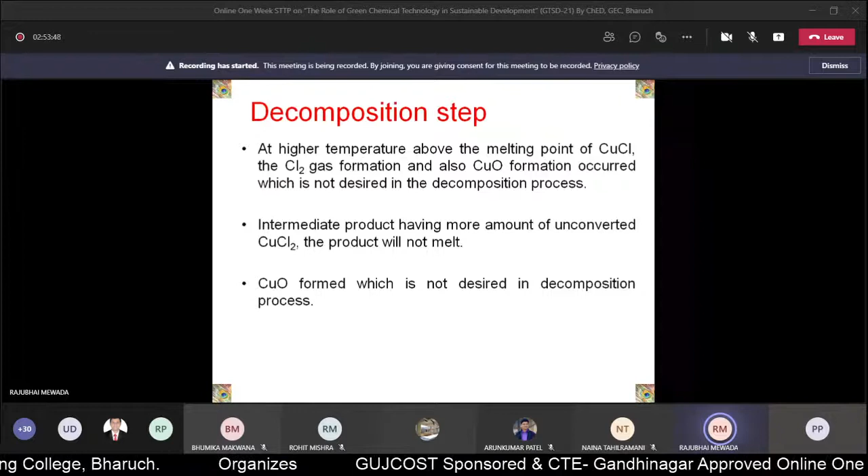So at the decomposition step, at high temperature above the melting point of copper chloride, gas formation occurs, and also copper oxide formation occurs, which is not the desired product. Theoretically we feel that when we carry out decomposition, there is only one desired product, but it is not the case. Many different products form with different compositions, and that's why achieving the desired selectivity is a big issue. Copper oxide forms, which is not desired in the decomposition process. Once it is copper oxide, it is not a useful product - we need to throw it out, meaning it cannot be recycled in the main process.

In the electrolysis process, definitely collection of the gases is an issue. One major step of electrolysis is just to produce copper, but like a 3-step or 4-step cycle, they integrate the hydrogen production step with electrolysis also. So if you want to produce hydrogen, hydrogen collection is one big issue, definitely as a separate process also.

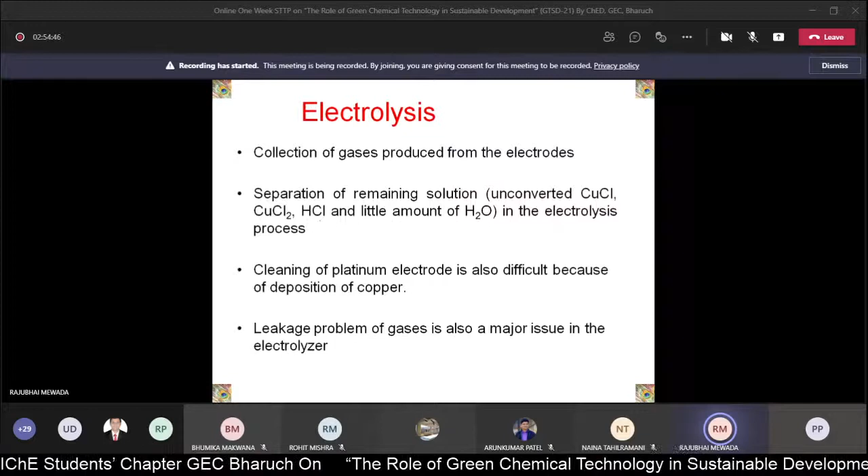And the second observation is about the electrodes we have used, like platinum electrodes or graphite electrodes. Cleaning of the platinum electrode is also difficult because of deposition of copper. Copper gets deposited on the platinum, and once it is deposited, removal is a big task.

Hydrogen production steps require careful material of construction for the reactor, as the reaction is highly corrosive in nature because it involves HCl, Cu plus HCl, with HCl in vapor phase at high temperature. So it is highly corrosive in nature.

There are issues related to gas collection and storage system, since we definitely need to handle hydrogen. What we did was collect the hydrogen under a pool of liquid, a simple submergence case. As the gas generates, it goes into the pool of liquid and pushes the liquid down, and you can measure how much hydrogen was collected, and that's what it shows.

We put in one outlet valve. When we open it, we can ignite it, so we can assure that yes, there is a flame of hydrogen. Definitely the quantity produced was very less, just enough to make sure the product was there, but efficiency was not there.

So very less conversion, and separation of unreacted material from the reaction is an issue, because in different steps, solid handling comes into the picture. Whenever raw material and product are both in solid phase, separation is a big issue, and separating unreacted raw material from the product is a big problem. Unreacted copper deposited on the reactor wall is quite difficult to remove, during electrolysis as well as during the copper chloride cycle.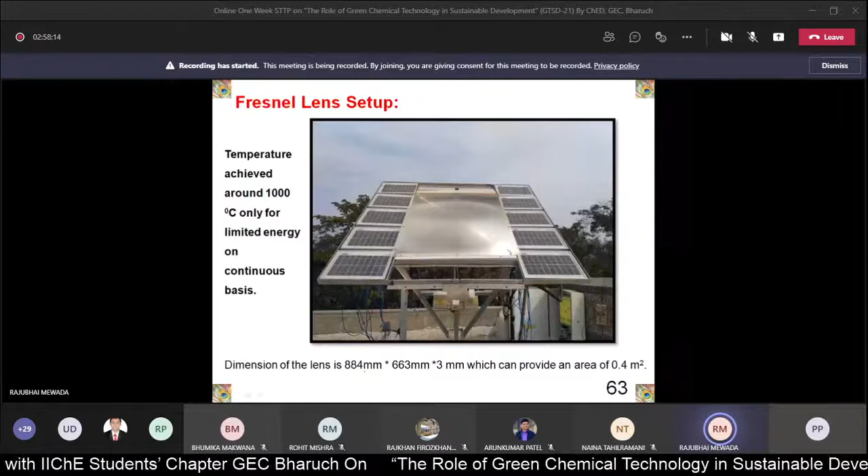Now, what is the problem with solar energy when we work with it? We know that the sun is moving continuously, practically changing its position every second. So what happens when we fix a location? When you focus at a fixed point, that's one reason all flat collectors have poor efficiency, because we cannot track the sun. In my case, I need to maintain the focus precisely at one particular location.

So even with the best efficient system, if the sun changes its position and I keep my system as is, it's not going to work. I must make sure that as the sun changes position, I also change the orientation of the Fresnel lens so that the focus remains on the same location. With reference to that, this two-axis tracking comes into the picture.

Two-axis tracking is needed because we need to move horizontally as well as vertically. We need to track both ways, because the sun doesn't move in just one specific direction, it moves slightly in both horizontal and vertical directions. That's why this two-way axis tracking system was designed.

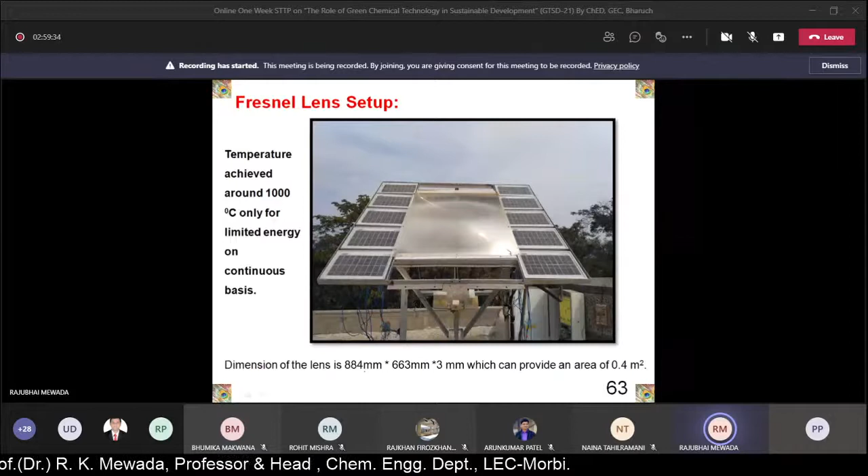I had it fabricated through a commercial fabricator to get it done. But my experience suggests this is not giving 100% accurate results, because even a slight change, even 1 degree change, may reduce the efficiency of the result.

You cannot make sure you are present every second to adjust it. Even though it is an automatic design, a fully solar-based system where the tracking system utilizes energy from solar energy through PV cells, because of poor tracking, I'm getting about 90% result, but there is no use of it since even a small 1 degree change may result in poor temperature achievement.

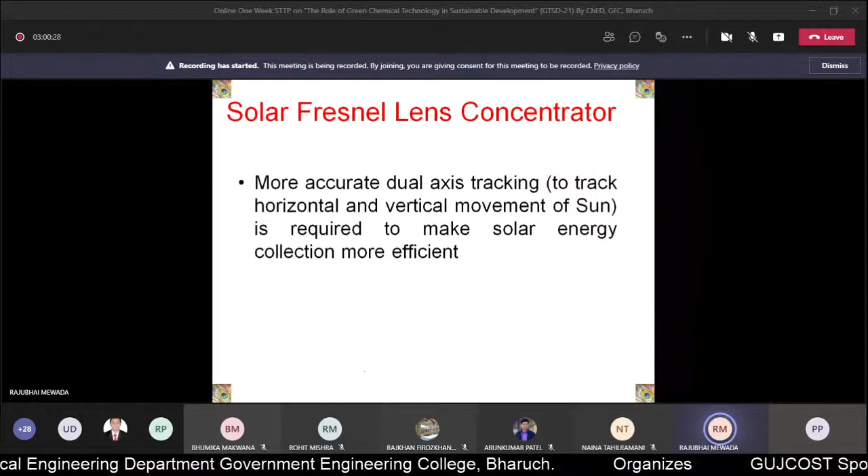So that's another problem we face: we need much better efficiency in the two-way tracking system, most efficiently using maybe a microprocessor-based system, which assures there is no deviation of even less than 1 degree, probably much lesser, so that we can make sure the focus is always on the designed point, and we can achieve the required temperature.

So this is what I've just shared, the work which I have carried out. These are the few things. Hydrogen production from water using solar energy can be a feasible option.

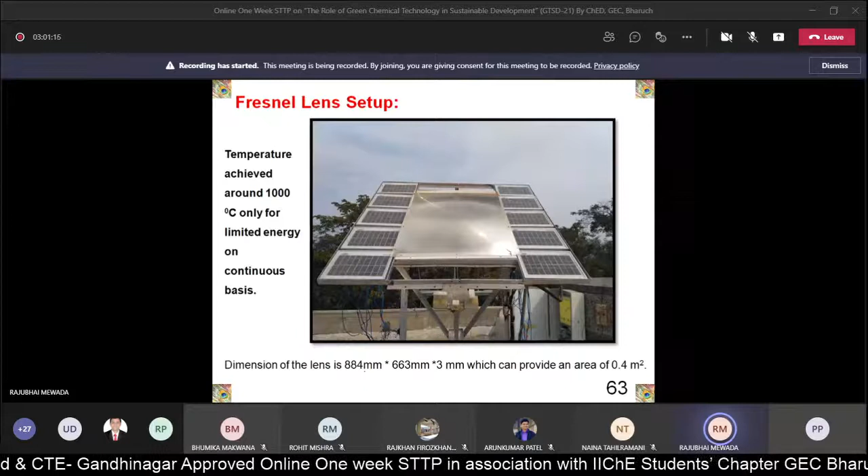Definitely, I'm not saying it is impossible. Lots of research is going on, and many researchers are already working in this direction. When I was in university around 2008, a project was started, and it continued even until 2016-17, more than 10 years. So what I'm trying to say is that copper chlorine cycle, sulfur cycle, or any other thermochemical cycle to produce hydrogen from water is definitely technically feasible.

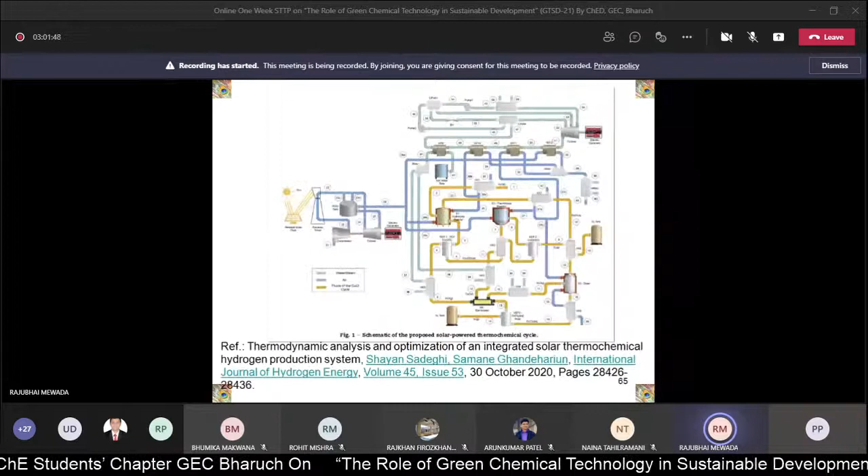People are working on it. The only thing is how to make it economically viable, even for the electrolysis process. Why will electrolysis become feasible? Definitely, PV cell technology is becoming cheaper and cheaper. Still, PV cells themselves are highly costly. But if we can use a large PV cell park in remote places like a desert, and produce a sufficient large quantity of hydrogen as a chemical fuel, and transport it to different applications or vehicles in different cities, then definitely it is going to be economically viable.

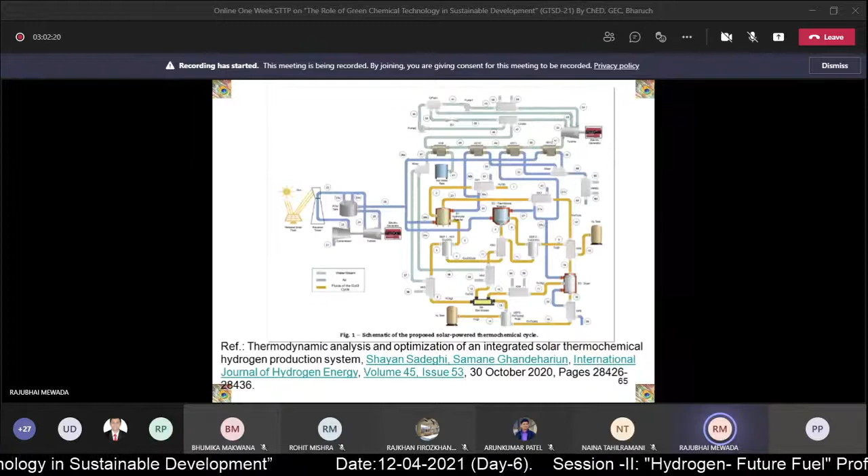I've just shared this one diagram from a recent paper which I came across, where they have proposed one such thought process utilizing this. You can see the complexity of the process involved. They've used a heliostat.

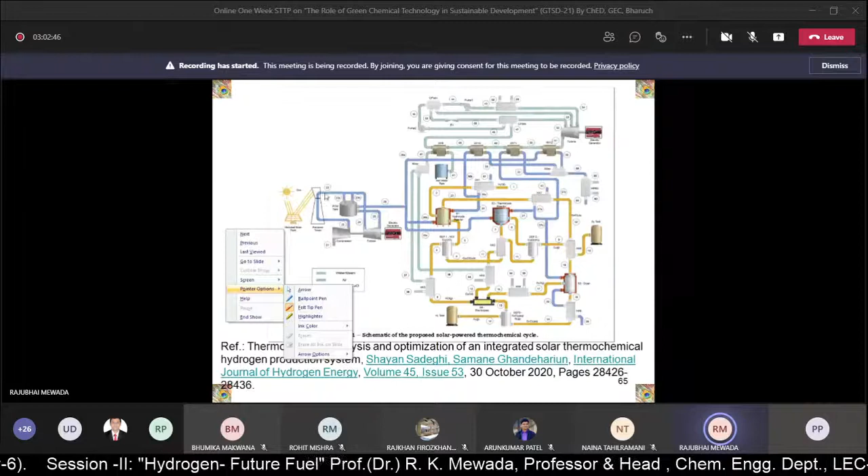You might have come across this heliostat, where there are again flat solar collectors only, but they move them in such a way that all the energy is received at a particular tower, and the temperature which can be achieved through this technology is around 400 degrees centigrade, something like that. That's what they have proposed. My intention is not to make it complicated, but only to show that people are working in this direction, and hydrogen production from water using solar energy or renewable energy can be a feasible option.

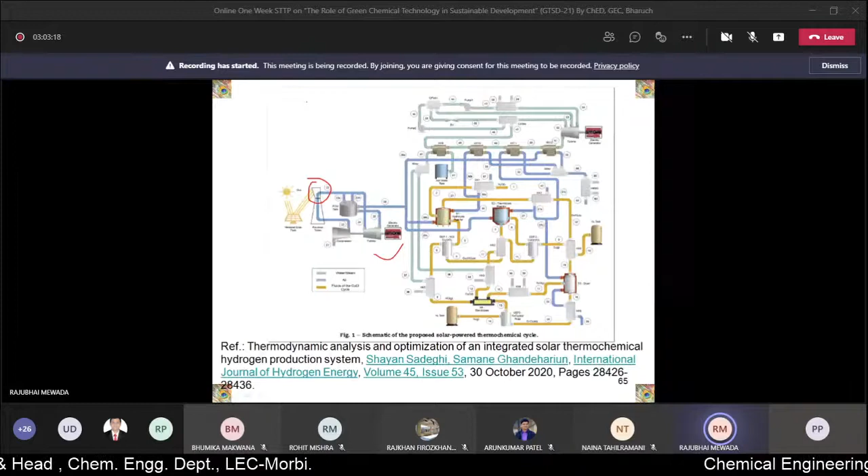Research is still going on. People are working in this direction, and we are hopeful that down the line, in coming years, we may come up with hydrogen as a fuel that is both economical and ecological, as a source of energy. One more challenge we need to address: even if we produce hydrogen economically, the second major problem is transportation and storage.

Definitely, because hydrogen is the lightest molecule - in the periodic table, H is the first atom, so it's the lightest - another problem is how we can increase its energy density. So we need to store it, like in a CNG system, using high pressurized cylinders. But because of the properties of hydrogen, we need very high pressure, an extremely high pressure system, which is not economically viable, because as we increase the pressure, the thickness of the storage vessel increases, and as thickness increases, weight and mass increase. So this is going to be one of the major problems.

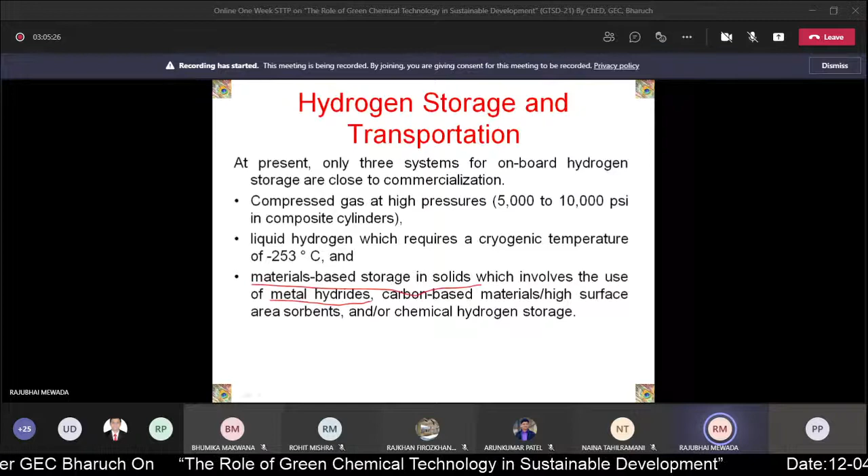If we go for liquefaction, then cryogenics comes in, so achieving and maintaining that temperature is a big challenge. Third, more basic research is going on regarding a combination approach, that is solid material based storage, where metal hydrides are one of the feasible options, where the reaction combination is reversible. We can absorb hydrogen onto a certain metal complex and store it, not at room temperature, but at a reasonably high pressure, though not as high as simple gas high pressure storage. It becomes reversible very easily, just by releasing it, and we can get the hydrogen wherever we require.

So people are working in that direction also. Storage and transportation is another big challenge, and again separate researchers are working separately in this direction. So definitely in hydrogen production, there are going to be lots of challenges.

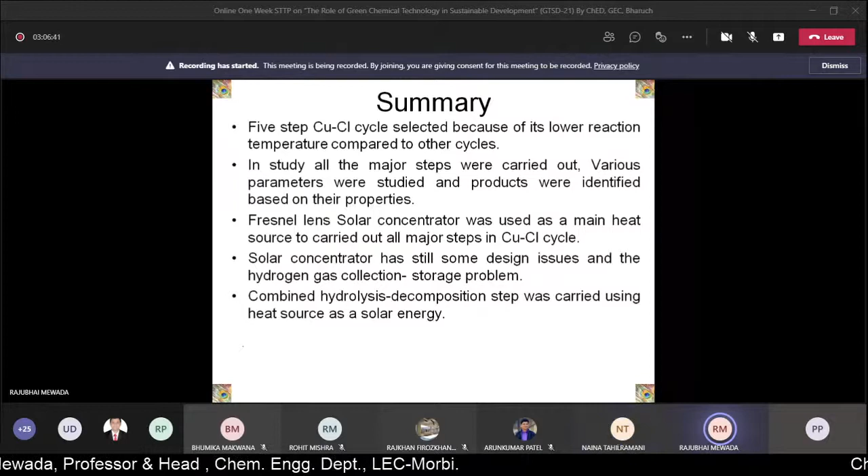So previously I discussed the copper chlorine cycle, where I started with redox reactions, but the redox reaction for zinc oxide reduction takes place at a much higher temperature, so it is not feasible. We need a feasible option, which comes through different thermochemical cycles—maybe copper chlorine or iodine sulfur cycle, etc., where temperature is achievable, maybe 550, 600, 700, 800 degrees.

So copper chlorine cycle is possible. In today's talk, I'll try to demonstrate that yes, we can produce hydrogen using a copper chlorine cycle. But there are different challenges in each step, and we need more systematic efforts and more scientific design so that we can find the solution.

And definitely, solar energy utilization is one of the best options available. Using a proper two-way tracking system is another challenging aspect.